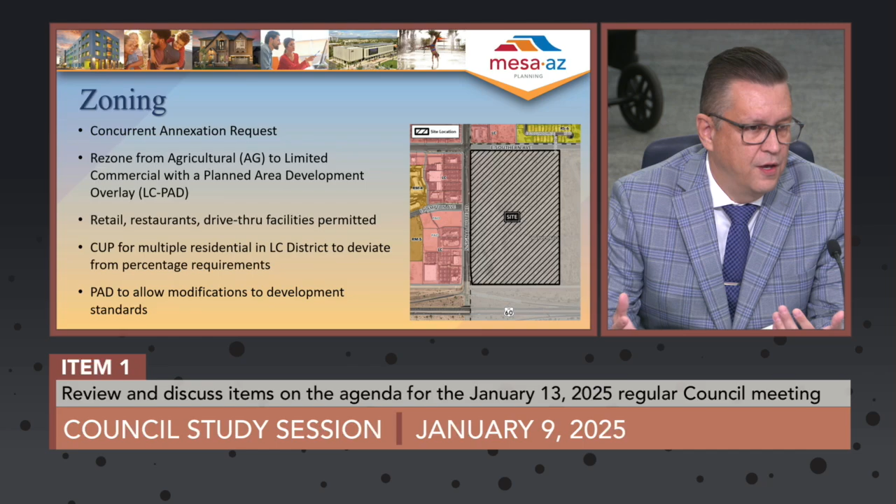They're also requesting a planned area development to allow modifications to specific development standards within the underlying LC district. As part of that council use permit, there are some specific approval criteria that the applicant needs to satisfy. I won't read them all to you, but staff did an extensive analysis on those.

There was one criterion that was not applicable, regarding existing buildings on the site, since the site is vacant. But other than that, staff did find that they were compliant with all of the review criteria for a council use permit.

The planned area development section of the zoning ordinance allows for approval of conceptual site plans with the caveat that they still need to come back for specific site plan approval, which would be through the Planning and Zoning Board if no additional deviations are being requested.

So when you look at parcel A specifically, there's a total of just over 300,000 square feet of commercial development, which includes a range of different types of development, and I'll get into that on the next slide. They're also exceeding the parking by exactly 140 spaces to accommodate restaurant users that have specific parking requirements.

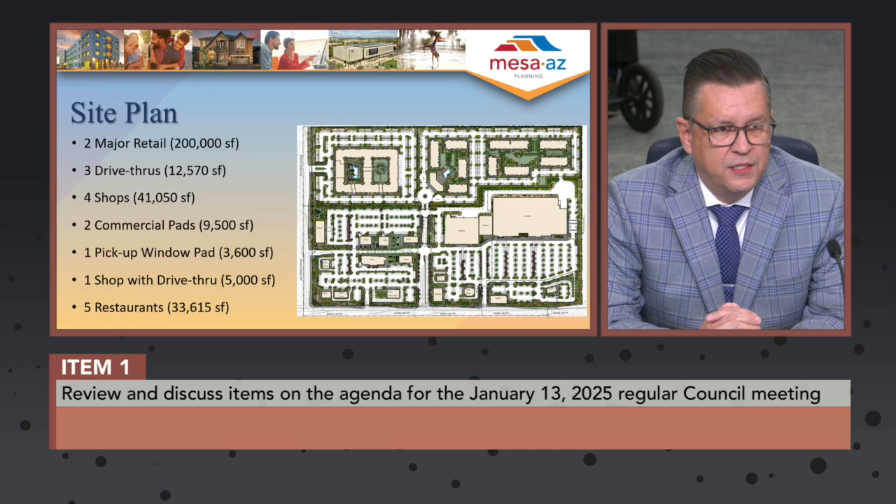Looking at the specific site plan a little more, on the left you can see a breakdown of the different types of retail uses. There are 2 major retail tenants, totaling approximately 200,000 square feet, located adjacent to US 60, on the south side of the site. There are 3 drive-throughs, 4 shops buildings, 2 commercial pads, a pickup window, 1 of the shops buildings with a drive-through, and 5 restaurants. There's also a bank with an ATM drive-up as part of this.

As Mary mentioned, staff and the applicant have worked extensively for many months on this site plan to really get the best site plan that we can for the city to demonstrate that level of quality. I think that shows itself in a few areas on the site plan.

First, if you look at the frontage of Signal Butte and Southern Avenue, there's a walking path, a jogging path that is separated from the sidewalk. There's all the standard city infrastructure that goes in - half streets, curb, gutter, sidewalks, all of those sorts of things. And then an additional walking path that traverses the site, starting at Major A, following all the way down Signal Butte and up Southern.

That is very intentional for 2 reasons. One, it provides an amenity for not only residents that might live in the multiple residences behind the commercial, but also just residents in the area. It also creates more of a separation from the street, and it would be landscaped, so we have enhanced landscaping in those areas.

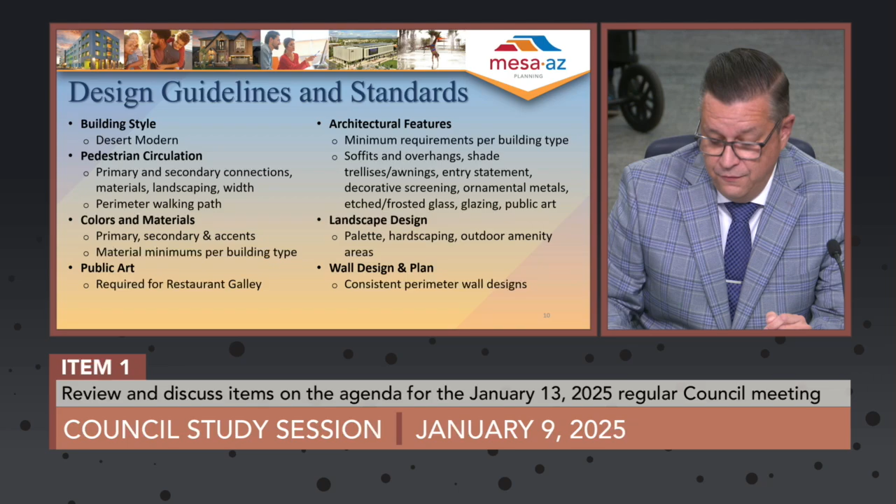There was extensive citizen participation as part of this. They reached out to property owners within 1,000 feet of the site and held 2 neighborhood meetings. Some concerns were brought up by residents, primarily traffic and an oversupply of drive-throughs.

One other thing I'd like to point out on the drive-throughs: you'll notice a few, Pad J and Shop C, have drive-throughs adjacent to Signal Butte. One area we really focused on in the design guidelines is how to visually mitigate that impact, through canopies over the drive-throughs so it feels more like a building and less like a building with a drive-through on the front.

There's also enhanced screening requirements that are part of that. So that's another element staff really worked on to increase the quality of the overall development.

Staff does find that it complies with the 2040 Mesa General Plan, as well as Chapters 31 and 70 for a council use permit, and the PAD and site plan review sections of the zoning ordinance. Staff is recommending approval with conditions.

The Planning and Zoning Board heard this at their December meeting. They also recommended approval with conditions by a vote of 6-0. And with that, I am happy to answer any questions the council might have.

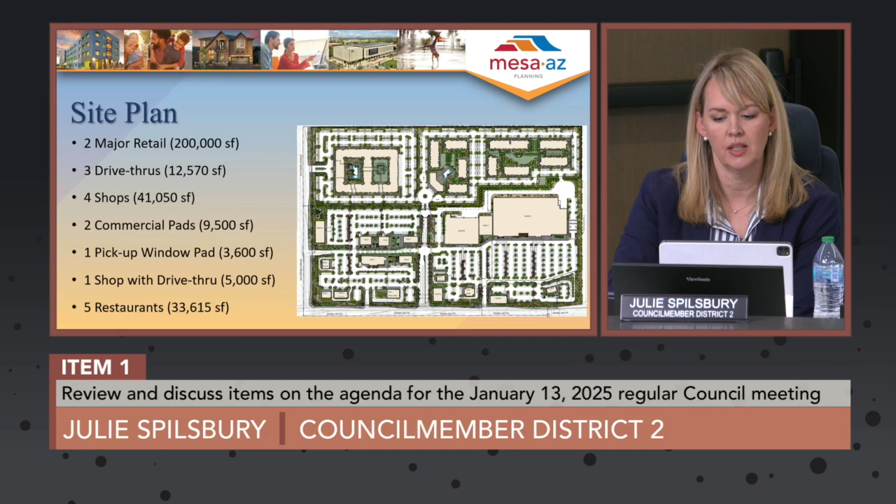So everything on that whole east section where you can see the pools, is that all residential too? Correct, maybe a good slide to look at here. That's Parcel B and Parcel C, not Pad B and C, I misspoke. Okay, that's why I was confused.

And then, are we trying to park it at 2.1, or what's the goal here on parking since we're so far east out there? They are asking for a parking reduction on Parcels B and C. Parcel B is 1.5 spaces per dwelling unit, and Parcel C is 1.7 spaces per dwelling unit.

And is the assumption that any overflow would just go into the commercial area? That is definitely a possibility, but as these progress to a specific site plan, we're going to require parking studies with very detailed analysis on how that works. So those details aren't going to be figured out quite yet. That's correct, but if they come in with a specific site plan for Parcel B or C that's not in conformance with what we're looking at today, that's technically an amendment to the planned area development overlay, so any new deviations would come back to council for review.

To your question, if I may intercede, how many of these are going to be one bedroom, two bedroom, three bedroom versus studio units?

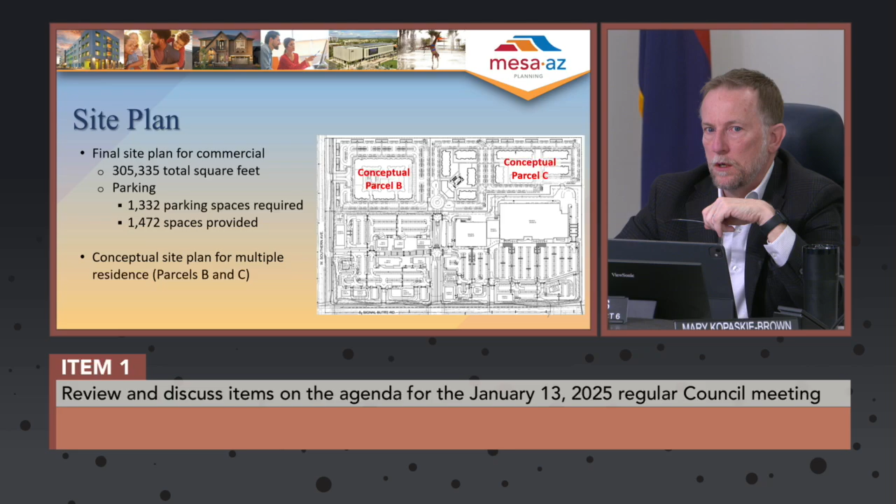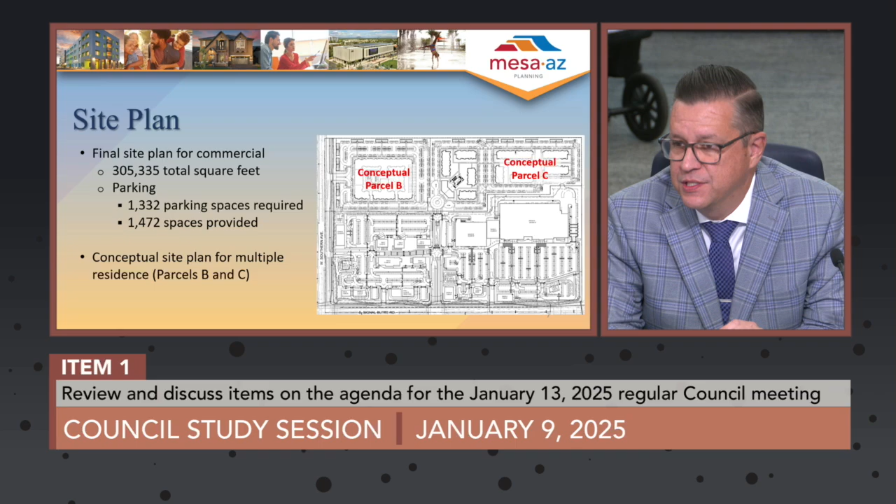That's a great question, and the developer is, to my understanding, still looking for specific users for these sites. So as that comes in, that's part of the math, the unit mix and how it works with the parking, and that's something staff is very aware of. And you can have accommodation within a building for that, anticipated, absolutely.

Can I interject? Typically the issue we worry about with parking is that it overflows into an area it's not supposed to be in, like a residence. What is the issue here? There's no residence around, so what do you think, is there overflow, or is it just assumed to go into the commercial parking lot? We have to assume the developer understands that and has planned for it.

There's no residential on the other side yet, right? It's on that very edge of town. There is a canal right there on the east side, so it's on the edge of town for some of you. I understand the parking issue when it comes to other close residents, but I think that's why the deviation works on this.

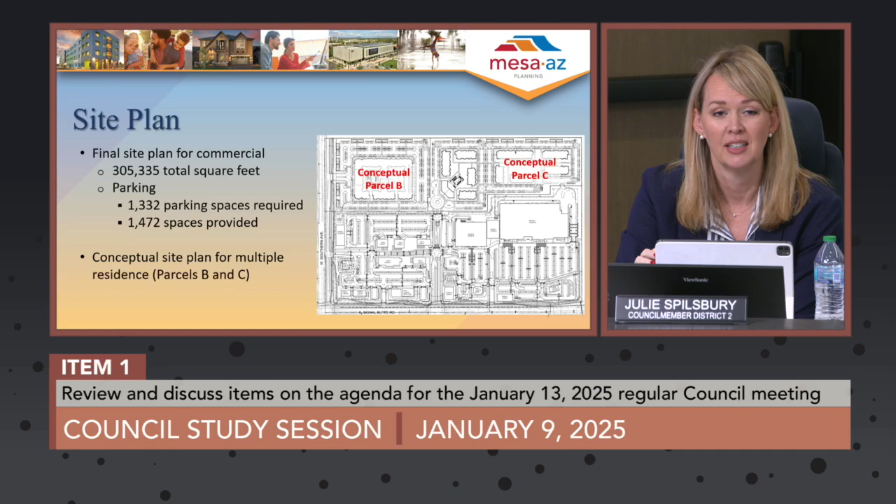So then I guess my other question, this is just such a huge property. Is the way to get to the residential part either coming off Southern and driving all the way to the back corner, or coming off Signal Butte and going through the commercial area to get to that back? That seems like such a far drive to get to your apartment in that back corner, but those are the only entrances. Councilmember Spilsbury, that's correct. Parcel B has direct access to Southern.

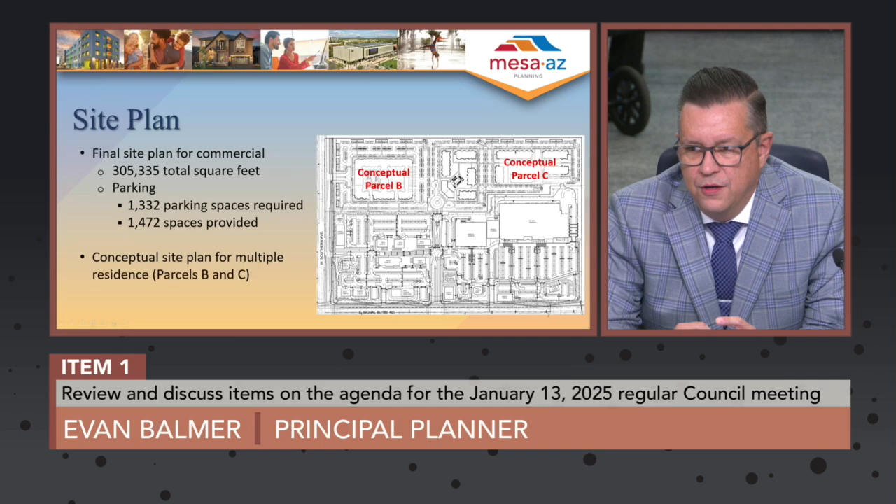Parcel C has access, but it's through the main commercial development. If you look at the design, there are some intentional elements. We have enhanced landscaping along that main drive, and it terminates into a roundabout, because we're not looking for dead ends into an apartment complex. This was very intentionally designed to give that corridor up to that specific pad parcel C.

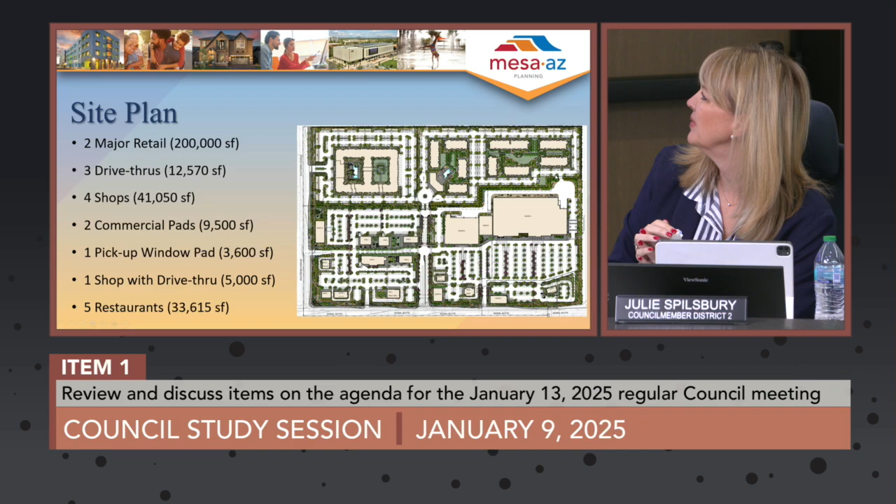Is the south little entrance there an emergency exit? I don't know how to point to something on here. Right in here? Yes. Is that an emergency exit? Correct, it's a secondary right behind the major A. So that's not a fire entrance requirement.

For residents, okay. And Mayor, Councilmember Spilsbury, that's actually where a lot of the loading and unloading will be for Target, so we wouldn't want to bring a lot of cars and people through that area. We want to keep that area secure for that use. Gotcha, okay.

Mr. Somers. Mary just hit on a concern I have. First of all, this whole presentation has two elements. The presentation we've had so far has been on the site plan, and I completely understand that. The other part, that staff and Councilmember Goforth have been working on, is the quality of the retail development, and I haven't heard any of that yet. So I'm hoping that's forthcoming in the discussion.

As for the site plan, I think there are some very good elements to this. One is you separated some of the uses so they don't conflict, which is nice. So you have the restaurant row or galley, cute, with the big box being separate and then the residential behind. One concern I do have on this is...

We tend to try to hide the back end of a store, which is unattractive typically, toward a freeway or something that's going to be hidden away where we're not going to see it. The other concern would be the noise from the backup buzzers that are OSHA required, since they're going to be backing up, and the back end of this major retail is backing up right against the residential component. So how is the developer planning to mitigate the backup buzzer noise issue? And is there a 360-degree design for this store since it faces a new residential component?

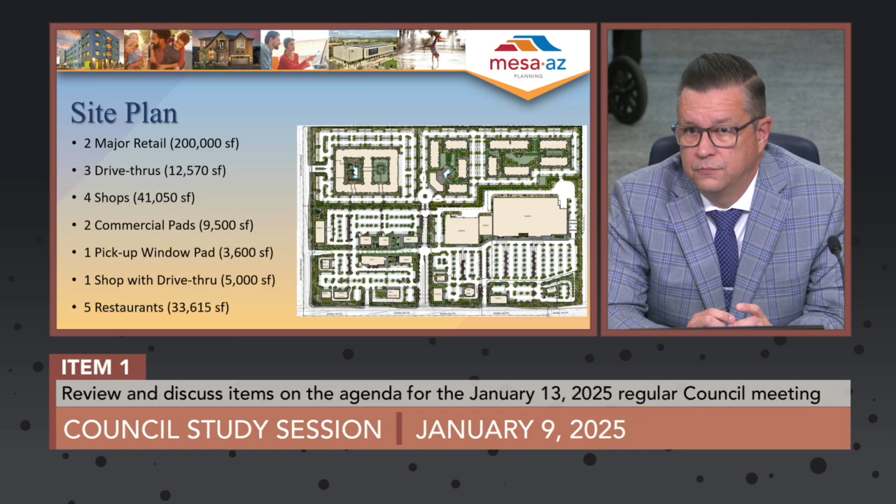Okay. Any more questions? Nothing on the site plan, but I'm still waiting for the discussion of the quality.

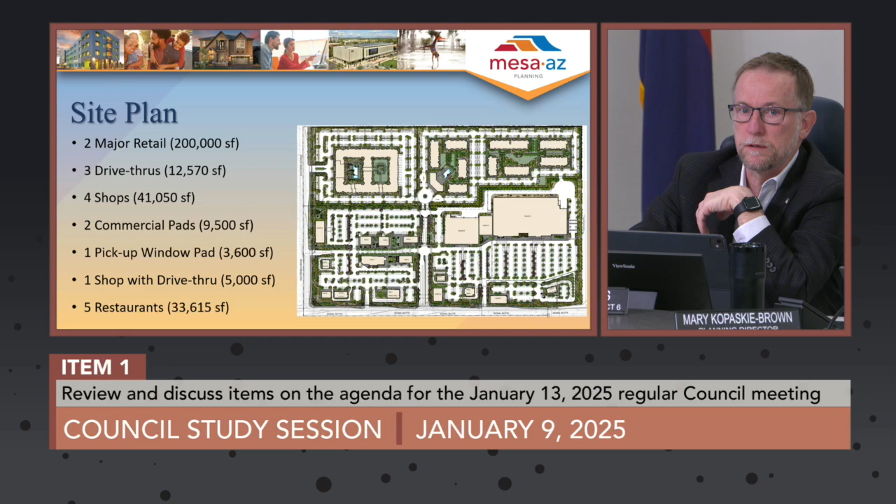To Mayor Freeman, Councilmember Somers, we are working on a development agreement as part of the rezoning process that looks at use restrictions. That development agreement will come at the same time as the zoning case, two weeks from now, for final action introduction. So we will have the DA prior to that, for the use restrictions. We're finalizing the use restriction development agreement now so that we don't get things like service stations, car repair, and more drive-throughs, similar to other use restriction DAs we're working on. That will be part of this zoning case.

There is a second DA I know we're still working on as it relates to the quality of the restaurants and the types of restaurants going in at Restaurant Galley. That will follow after the zoning case. Why would we proceed for zoning without it?

So what I might do is ask if Maria is available. Sorry, Jim. I'd like to know what we're getting, because this has been something the council member's been working on for quite some time, insisting on higher quality. I've heard stories that this might be happening, but I would like some guarantees, because we've seen cases where we've advanced a case and vested rights in a property, which right now is agriculture, and then had all those things fall far short of what our community expected. So it seems premature to move forward without that DA. Why are we moving forward without it? Where's the DA? I want to see it.

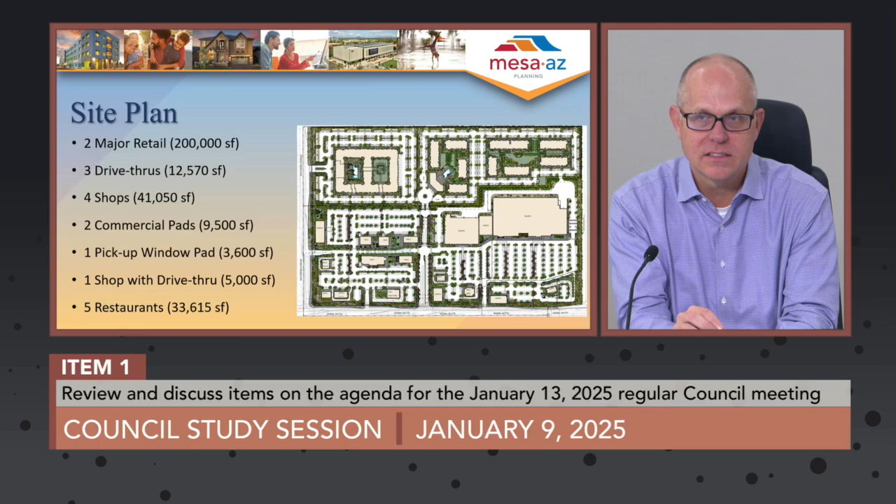We're trying to incentivize really high-end users, and so I'll let Maria talk about that type of incentive. In order to enter into those agreements, you have to do certain studies and analysis, and that takes almost another 3-month period. That would delay the ability for the developer to close on the property. So that's why we looked at it as we're still protected because we get the use restriction DA recorded on the property, and then we'll provide the incentive DA 3-4 months from now when we have all the information to do that DA.

Let me weigh in. Our incentives for development are performance-based, so just because we have an incentive DA, it's all dependent on the performance of the developer. The developer can choose not to pursue the incentive and develop something different. What we're trying to do is provide an incentive to perform, meaning to bring in a qualitative type restaurant, something unique, something local, a regional retail center that we think justifies us providing a reimbursement for public facilities.

But there's a couple of things to this. So not just encouraging to build that, but we are also granting through a CUP additional residential development opportunities that typically aren't there in an LC. And in exchange for that, please bring a unique development, right? Do something different that we haven't seen in Mesa. If we don't tie the development agreement, if we only tie it to incentives, they could build what I call just a traditional commercial strip and not bring that unique experience.

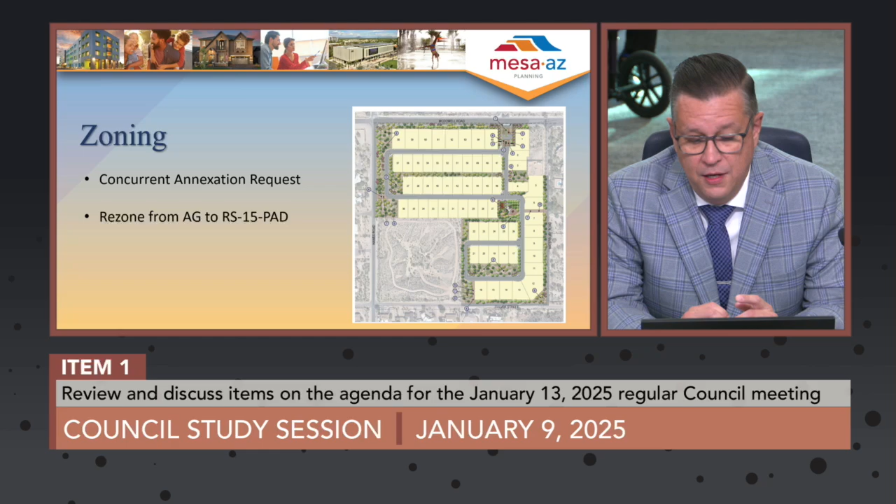Thank you, Mayor, Councilmember Spilsbury. On the street widths, they are private streets, so they're not going to be city-maintained streets. They are generally consistent with our public street cross-section. The driveways, we have front setback requirements, and the driveways will accommodate two cars if needed.

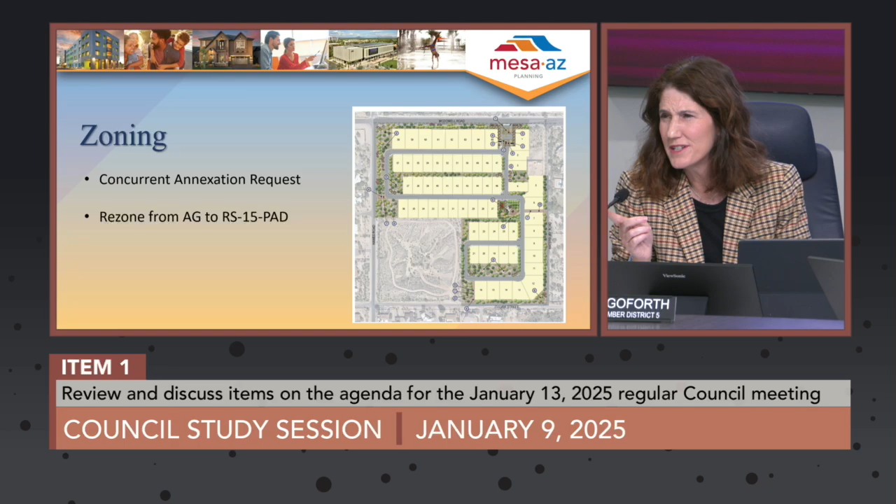Would the mayor entertain- and I know I have a meeting on this property, so I can get into the weeds on that later. Did you say, sorry I zoned out for a second, did you say 36 feet? I think, Sean, you told 36 feet? 35, okay, from curb to curb for the street.

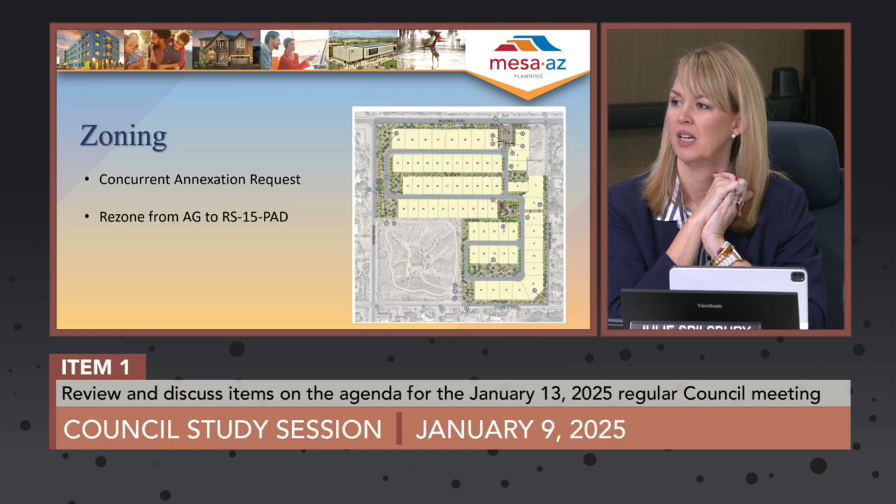And they've added sidewalks, just FYI. Oh, they've added sidewalks, okay, they've added some sidewalks. You just can't tell it's all blocked out, like where there would actually be a yard or a driveway or a sidewalk or anything like that.

Mayor, Councilmember Spilsbury, the reason for that is this is just a rezoning at this point. It'll be platted, and each individual property owner will build based on that plat. But the number would stick to 65, that's correct. It wouldn't necessarily change that number. You have this specific number in the rezoning, and it carries to the plat.

Okay, I think that was my only question. It's exciting to see single-family homes, honestly, because we just get bombarded with multifamily, so yay. Mayor, any more comments? No.

Councilmember Goforth. Mr. Adams, sorry, I know who you meant. I'm just curious, there was one dissenting vote at Planning and Zoning. Do you recall the reasons for the dissent, the concerns? Yes, thank you, Mayor, Freeman, Councilmember Adams. It was one of the board members who thought that the density and the size of the lots was incompatible in that neighborhood. Thank you.

Councilmember Adams, if you look at the surrounding county, it is a significant difference. But it was important that we looked at what other city developments had done, not that we disregarded the county altogether. This is still all in the desert uplands, which has guidelines for low density. It is a little bit higher than most of the others, but not radically different, so we're moving upwards a little bit, but it's not a significant change. It's still single-family, not multifamily, not a grocery store, which is really compatible with this area.